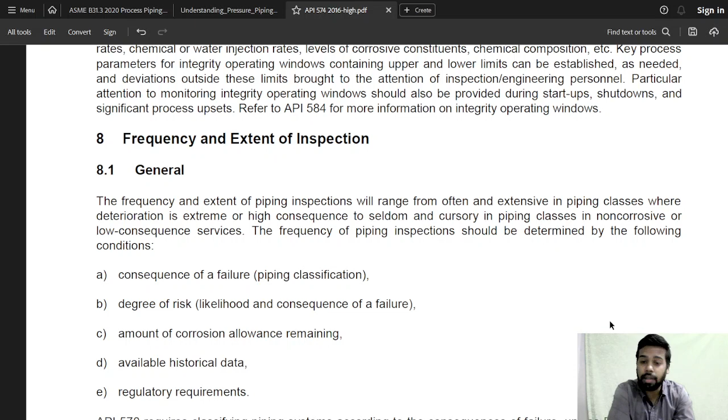Now we'll go towards the 8th section of API 574 inspection practice document, which is the frequency and extent of examination or inspection. Frequency and extent of inspection will range from often and extensive in piping classes where deterioration is extreme or there is a high consequence, to seldom and cursory in piping classes with non-corrosive and low consequence service.

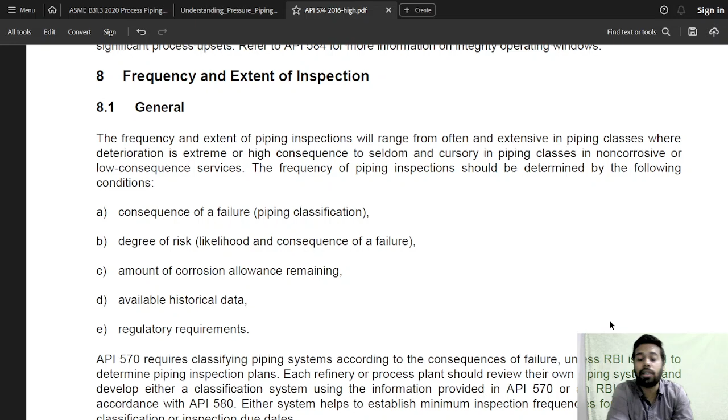So the extent and frequency of inspection is going to be very high where the damage rates are accelerated or the consequence of failure is very high. It's obviously going to be low for low damage mechanisms, or if the damage mechanism is not accelerated, the inspection interval can also be low. The same applies for a very low consequence of failure associated with the equipment.

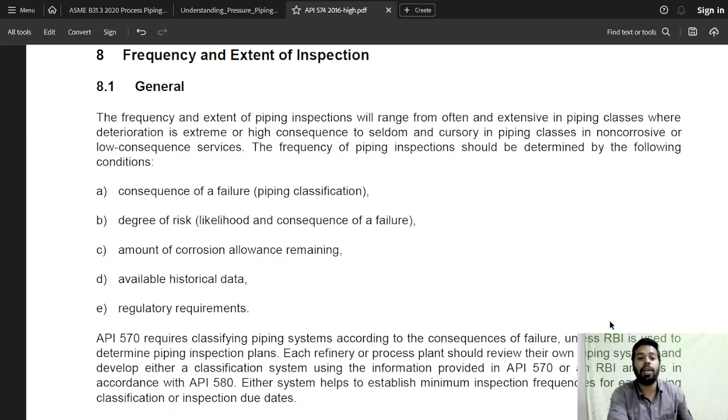API 570 requires classifying the piping systems according to the consequence of failure, unless RBI is used to determine the piping inspection plan. Each refinery or process plant should review their own piping system and develop either a classification system using the information provided in 570, or use RBI analysis.

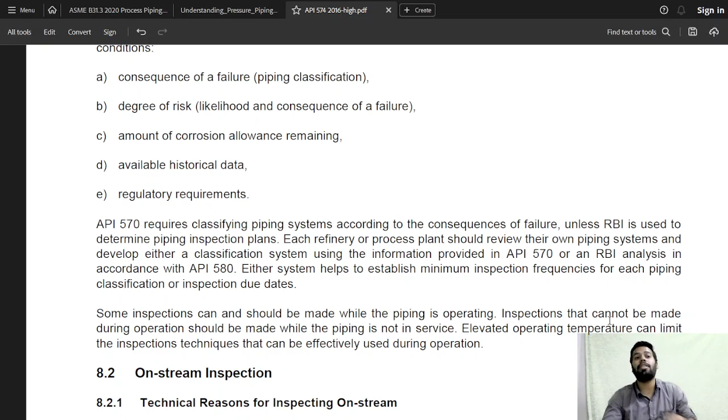So 570 has given us class 1, class 2, class 3 and class 4. For different classes, what kind of thickness, what should be the interval for thickness monitoring, and what should be the interval for external visual examination is already laid out. You can use that, or you might use a risk-based inspection program for identifying the intervals.

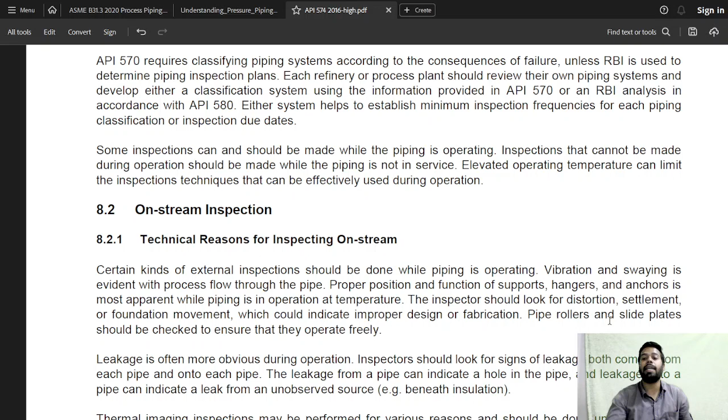Either system will help you establish the minimum inspection frequency for each piping classification, or inspection due dates. Some inspections can and should be made while the pipe is operating. Inspection that cannot be made during operation should be made when the pipe is not in service. Elevated operating temperature can limit the inspection techniques that can be effectively used during operation.

On-stream inspection - we have seen various kinds of inspection that can happen: on-stream inspection, visual inspection, supplementary inspection, vibratory pipe inspection, and various kinds of NDT that can be applied. Certain kinds of external inspection should be done when the pipe is operating.

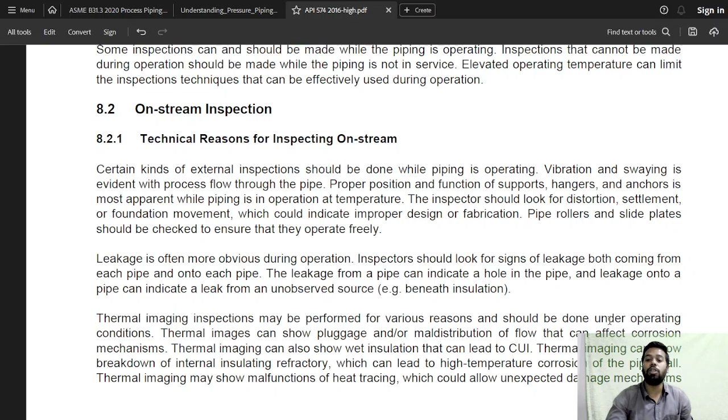Vibrating and swaying is evident when process flows through the pipe. Proper positioning and functioning of the support hangers and anchors is most apparent when the pipe is operating at temperature. The inspector should look for distortion, settlement or foundation movement which could indicate improper design or fabrication. Pipe rollers and slide plates should be checked to ensure they operate freely.

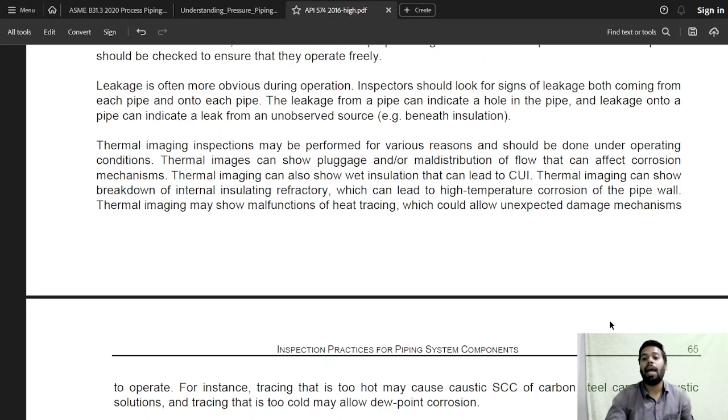Leakage is more obvious during operation. The inspector should look for signs of leakage both coming from and onto the pipe. Thermal imaging inspection may be performed for various reasons and should be done under operating conditions. Thermal imaging also shows wet insulation that can lead to CUI. Thermal imaging can show breakdown of internal insulation or refractory, which can lead to high temperature corrosion of the piping wall.

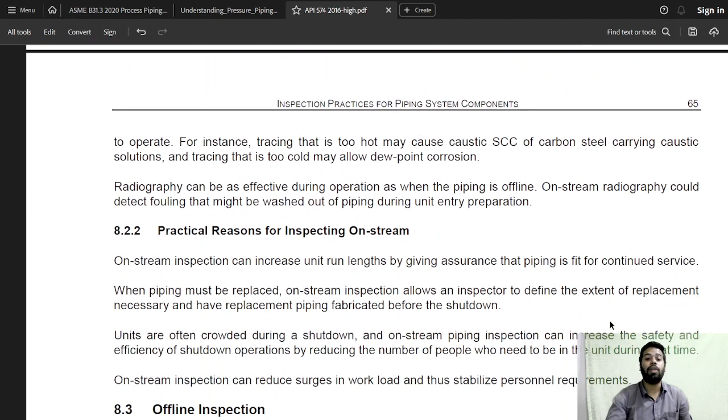For instance, radiography can be as effective during operation as when the pipe is offline. On-stream radiography could detect fouling that might be washed out of the piping during unit entry preparation.

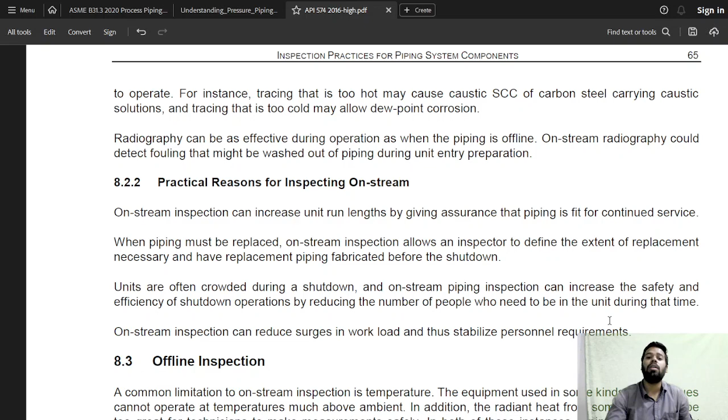Practical reasons for inspecting on stream: obviously the reason is that you don't have any downtime. You can identify various process conditions while the pipe is on stream. You don't need to shut down the pipe to do this.

When pipe inspection can be done on stream, it can increase unit run length by giving assurance that the pipe is fit for continued service. When piping must be replaced, on-stream inspection allows the inspector to define the extent of replacement necessary and have replacement piping fabricated before the shutdown.

Units are often crowded during the shutdown, and on-stream piping inspection can increase the safety and efficiency of the shutdown operation by reducing the number of people who need to be in the unit during that time. On-stream inspection can also reduce surges in workload, thus stabilizing personnel requirements.

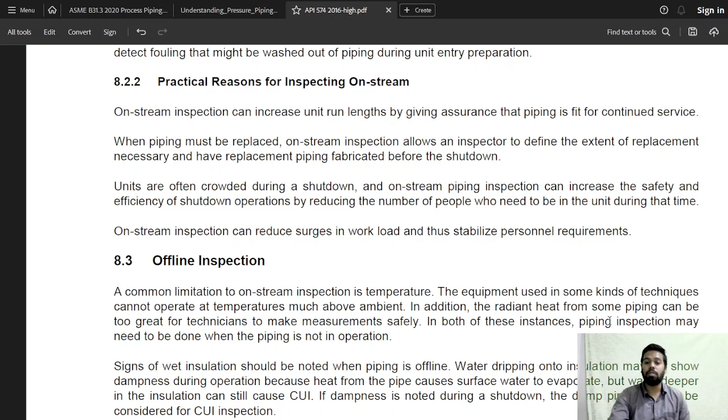Offline inspection occurs when the pipe comes offline, or when it comes to shutdown, or when the pipe is shut off, and sometimes it may be disassembled.

The common limitation to on-stream inspection is temperature. The equipment used in some kinds of techniques cannot operate at temperatures much above ambient temperature. In addition, the radiant heat from some piping can be too great for the technician to make measurements safely. In both these instances, the piping inspection may need to be done when the pipe is not in operation.

Signs of wet insulation should be noted when the piping is offline. Water dripping onto the insulation may not show dampness during operation because heat from the piping causes the surface water to evaporate. But water deeper in the insulation can still cause CUI if the dampness is noted during shutdown. The damp piping should be considered for CUI inspection.

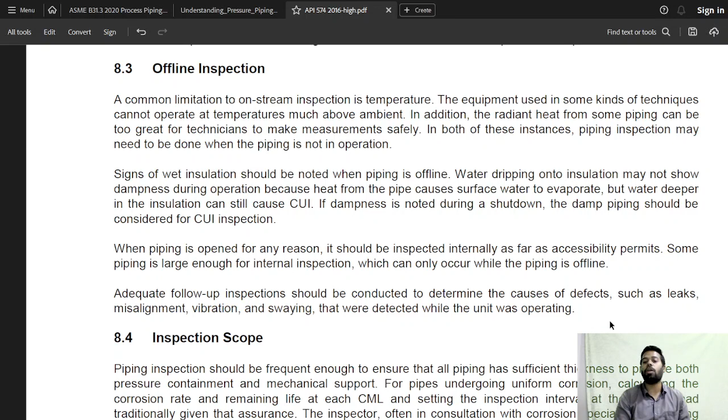When piping is opened for any reason, it should be inspected internally as far as accessibility permits. Some piping is large enough for internal inspection, which can occur when the pipe is offline.

Inspection scope: Piping inspection should be frequent enough to ensure that all piping has sufficient thickness to provide both pressure containment and mechanical support. For pipes undergoing uniform corrosion, calculate the corrosion rate and remaining life at each CML, setting the inspection interval at half-life, has traditionally given that assurance.

The inspector is often in consultation with the corrosion specialist and piping engineers, who help decide the number and location of CMLs. RBI may be used to determine the interval or due date and the extent of examination.

For degradation mechanisms other than uniform corrosion, the inspector should determine the type of inspection, the frequency, extent, and location of the CMLs. Corrosion and pressure equipment engineers have typically helped in this process.

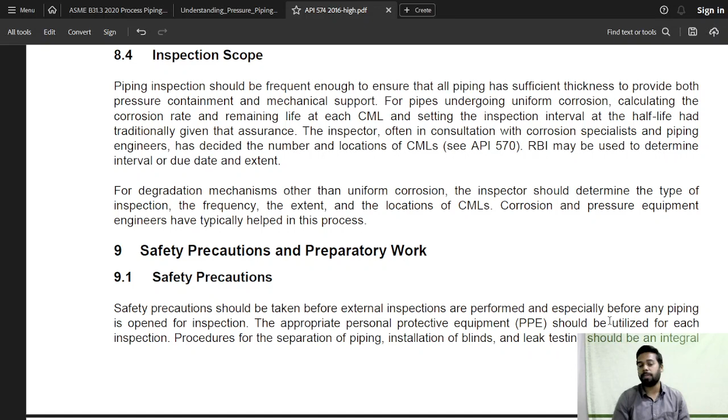Safety precautions and preparatory work before the inspection: Safety precautions should be taken before external inspections are performed, especially before any piping is opened for inspection. The appropriate personal protective equipment should be utilized for each inspection. Procedures for separation of piping, installation of blinds, and leak testing should be an integral part of the safety practice.

In general, the section of the piping to be opened should be isolated from all sources of harmful liquids, gases, vapors, and purged to remove oil and toxic or flammable gases and vapors.

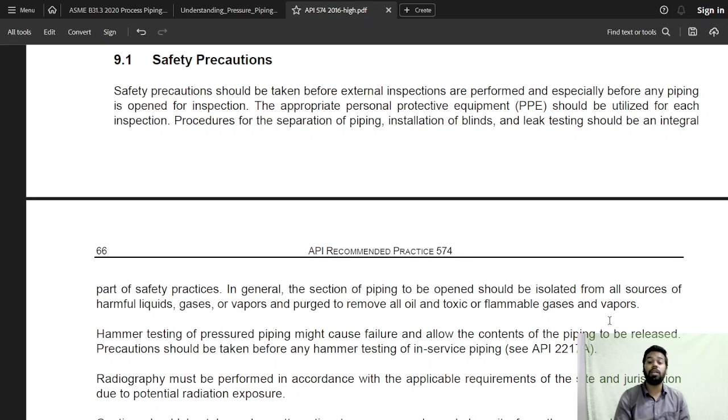Hammer testing of pressurized equipment may cause failure and allow the contents of the piping to be released. Precaution should be taken before any hammer testing is done for in-service piping, per API 2217A. Radiography must be performed in accordance with the applicable requirements of the site and jurisdiction due to potential radiation exposure.

Caution should be taken when attempting to remove scales and deposits from the external surface of in-service piping, especially when operating at high pressure or high temperature with hazardous, flammable process fluids. Loss of containment incidents have occurred when deposits were removed while inspecting for CUI.

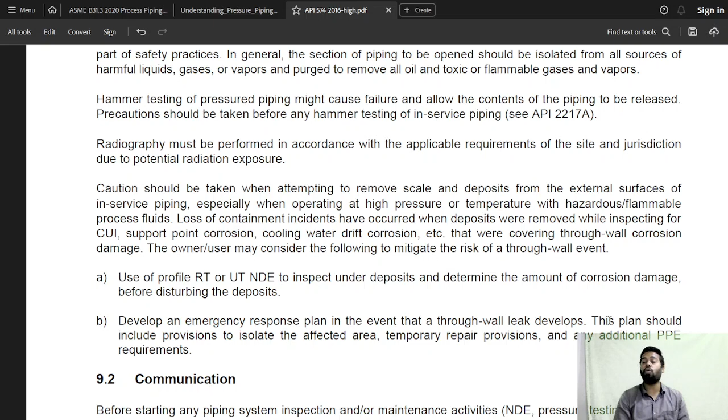Support point corrosion, cooling water drift corrosion, and other issues can hide through-wall corrosion damage. To mitigate the risk of a through-wall event, the owner-user may consider using Profile RT or UT non-destructive examination, and developing an emergency response plan in the event that a through-wall leak develops. This plan should include provisions to isolate the affected areas, temporary repair provisions, and any additional PPE requirements.

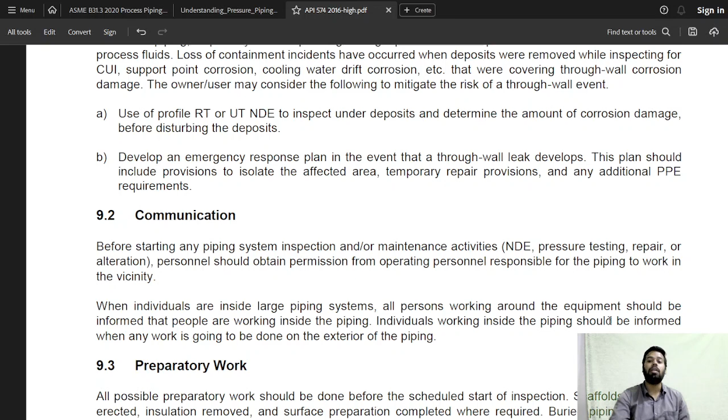Communication before starting the piping inspection or maintenance activities. Personnel should obtain permission from the operating personnel responsible for the piping to work in the vicinity. When individuals are inside large piping systems, all personnel working around the piping should be informed that people are working inside the piping.

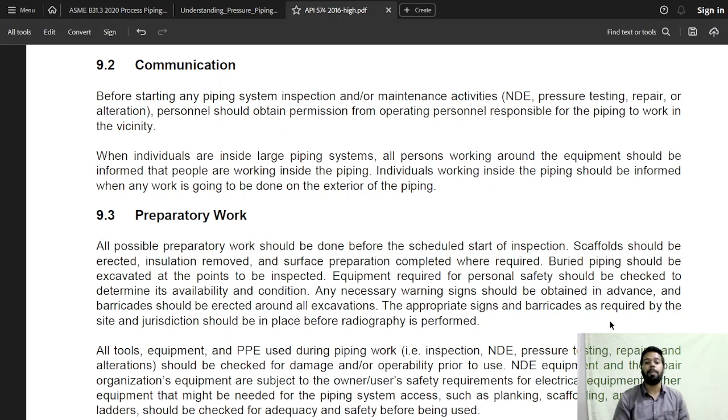Individuals working inside the piping should be informed when any work is going to be done on the exterior of the piping. Preparatory work: all possible preparatory work should be done before the scheduled start of inspection, such as scaffolds erected, insulation removal, surface preparation completed when required, and buried piping excavated at inspection points. All of these things are to be done.

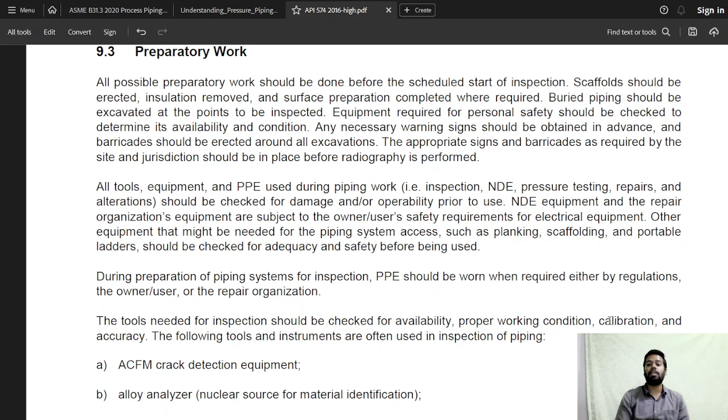All tools, equipment, and PPE used during inspection should be checked for damage or operability prior to use. Non-destructive examination equipment and repair organization equipment are subject to owner-user safety requirements, including for electrical equipment. Other equipment that might be needed for piping system access, such as planking, scaffolding, and portable ladders, should be checked for adequacy and safety before being used.

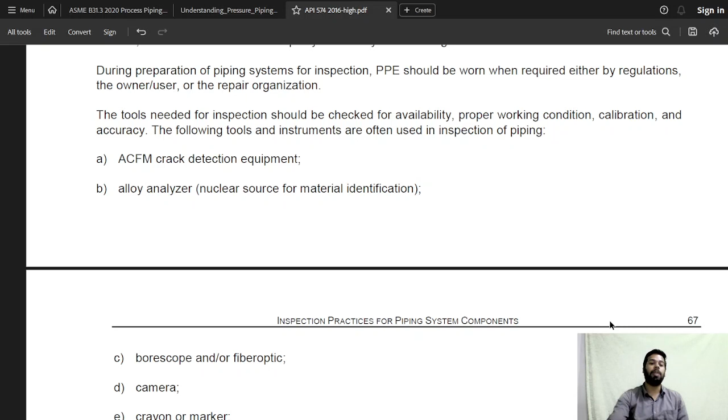The tools needed for inspection should be checked for availability, proper working condition, calibration, and accuracy. The following tools and instruments are often used in the inspection of piping, such as ACFM crack detection equipment. All of these tools are used - this is a general list.

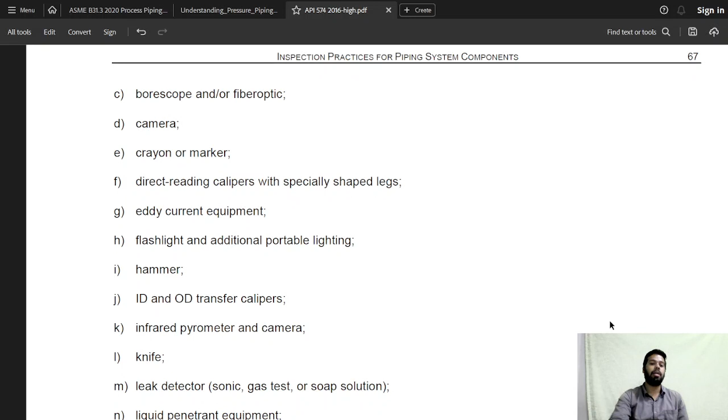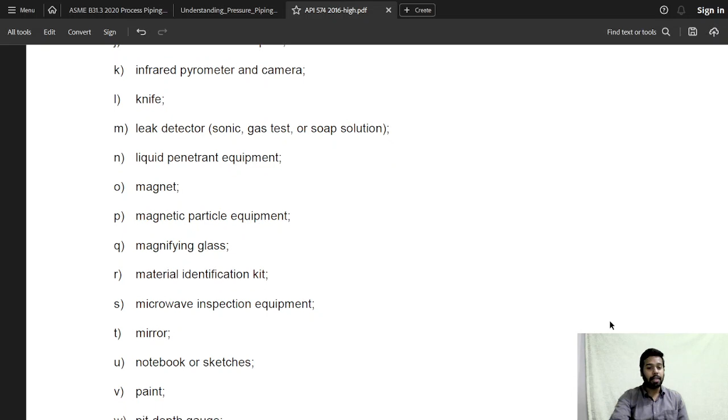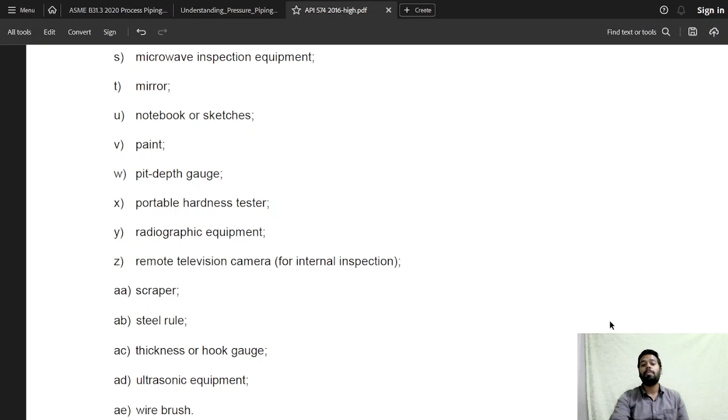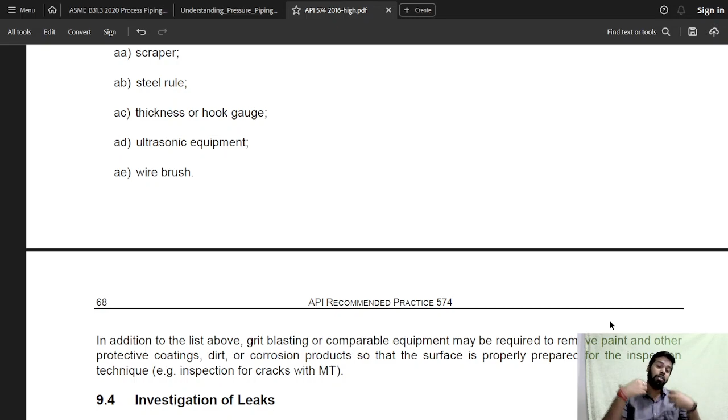ACFM detection equipment, alloy analyzer, borescope, fiberoptic, camera, crayon marker, direct reading calipers, eddy current equipment, flashlight, hammer, ID/OD transfer calipers, infrared pyrometers, knife, leak detectors, magnetic particle testing equipment, liquid penetrant testing equipment, magnifying glass, material identification kit, microwave inspection equipment, mirror, notebook sketches, paint, pit gauge, pit depth gauge, portable hardness tester, radiography equipment, remote television camera, scraper, steel rule, thickness or hook gauge, ultrasonic equipment, wire brush. Any additional equipment that is needed should also be added to this list.

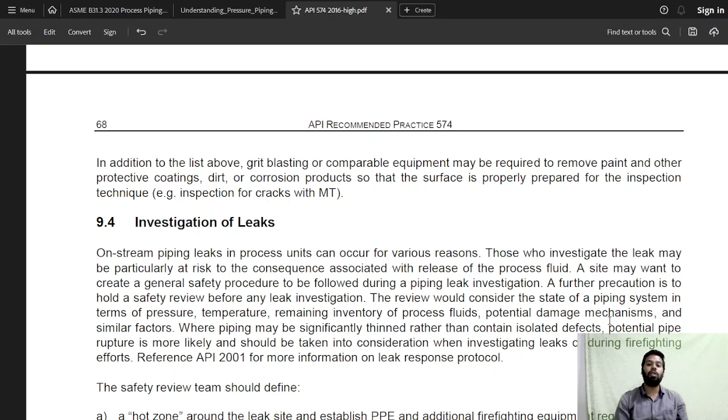In addition to the above list, grit blasting or comparable equipment may be required to remove paint, protective coating, dirt, or corrosion products so that the surface is properly prepared for the inspection technique.

Investigation of leak: on-stream piping leaks in process units can occur for various reasons. Those who investigate the leak may be particularly at risk of consequences associated with the leak or with the release of process fluid. The site may want to create a general safety procedure to be followed during pipe leak investigation. A further precaution is to hold a safety review before any leak investigation.

The review should consider the state of the piping system in terms of pressure, temperature, remaining inventory of process fluid, potential damage mechanism, and similar factors. Where the piping may be significantly thinned rather than contain isolated defects, potential pipe rupture is more likely and should be taken into consideration when investigating leaks or during firefighting efforts.

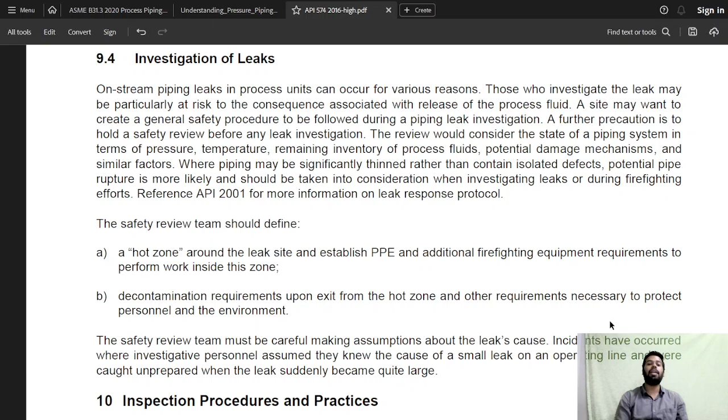Refer to API 2001 for more information on leak response protocol. The safety review team should define a hot zone around the leak site and establish PPE and additional firefighting equipment requirements to perform work inside the zone. Decontamination requirements upon exit from the hot zone, and other requirements necessary to protect personnel and the environment, should be reviewed.

The safety review team must be careful making assumptions about the leak cause. Incidents have occurred where investigative personnel assumed they knew the cause of a small leak on the operating line and were caught unprepared when the leak suddenly became quite large.

Okay, so these two sections were pretty similar. In the next section, section 10, which is going to be more inspection procedure heavy, that's going to be most important. It will tell you how certain kinds of inspection are to be carried out. We already know how thickness is investigated with the help of UT, but how to do that UT examination will be written in section 10 of this code. So we'll talk about section 10 in great detail, which is going to be again the most important section of this code. We'll look at that in the next video. Until then, that's it.